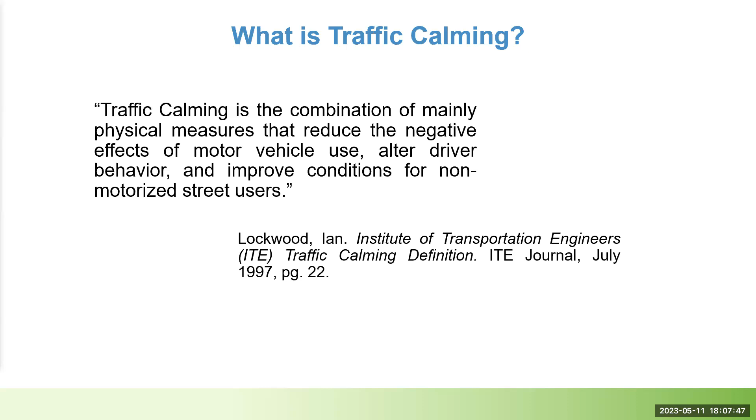There are quite a few examples of traffic calming in Ann Arbor, so we'll show some of them in later slides. But if you weren't familiar before today, the traffic calming program in Ann Arbor is designed to provide residents with a formal process for engaging with the city in a partnership to perform a technical analysis of traffic concerns on local streets and to explore potential solutions using those fundamentals of traffic calming.

Here in the city, it's a 5-step program. I'll briefly describe each step, but there's a guidebook available online that has more detail if you'd like to review anything after this meeting.

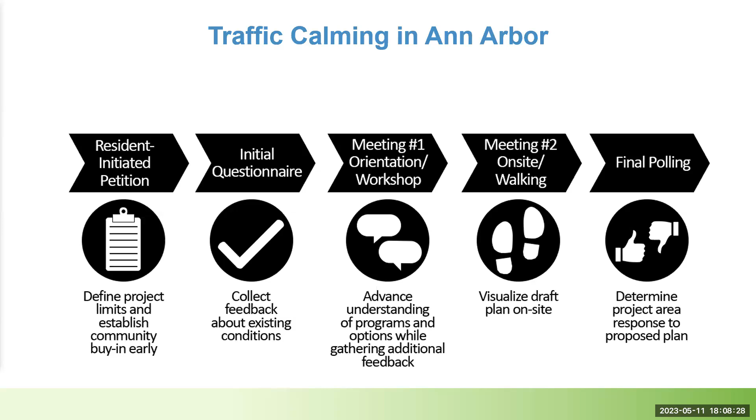Starting with step 1, the Grandview Drive project started with one of your neighbors acting as a petitioner who submitted a request to the traffic calming program for Grandview Drive between Jackson Avenue and Dexter Avenue. After defining the project area, the petitioner gathered signatures from other residents who also live in this area.

The requirement for the traffic calming program to accept the request is that at least 50% of the defined project area must support the project, and then a preliminary technical study must result in at least 10 points. The Grandview Drive project area managed to collect signatures from 100% of the addresses, and the preliminary study resulted in 11 points. There is a breakdown of those points available on the project website, but that slide is just to show you that we were able to move on to step 2.

So at step 2, Wade Trim sent out mailers with an initial questionnaire to all of the project area residents, just to gather feedback on specific concerns you may have had or may have, and what experiences you may have previously had with traffic calming. The requirement to continue on to step 3 is that at least 50% of those who participate in the questionnaire must support the project moving forward.

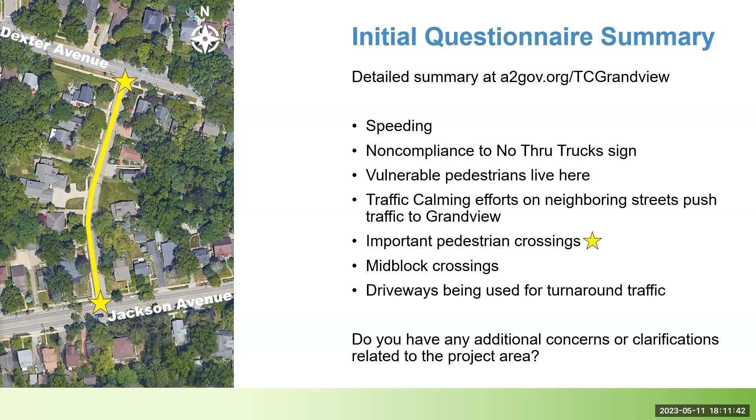Okay, step 3 is where we are today, where most of the focus for the rest of the meeting will be. Before we present the starter idea, we'll just go through an overview of the device toolbox that's described in the program's guidebook.

Before I do that, I will launch another poll that's just asking how familiar you might be with the guidebook. The question reads: have you reviewed the traffic calming guidebook, specifically the device toolbox found on pages 9 through 12?

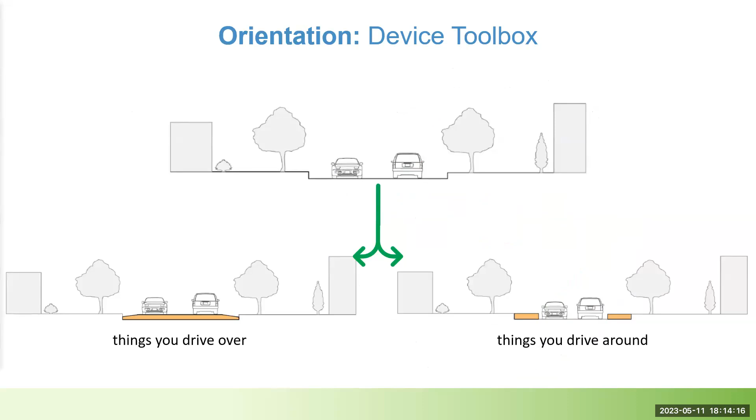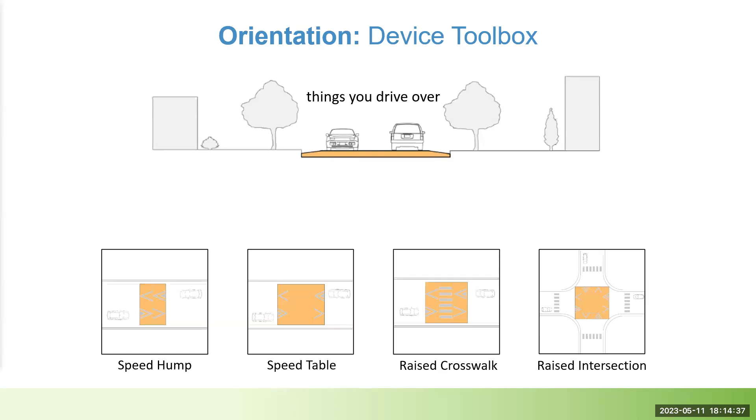On pages 9 through 12 of the traffic calming guidebook, devices are grouped into things you drive over and things you drive around. The things you drive over are devices that slow traffic by creating discomfort if traveled over at a speed exceeding 25 miles an hour. The device toolbox presents four devices in this category: speed humps, speed tables, raised crosswalks, and raised intersections.

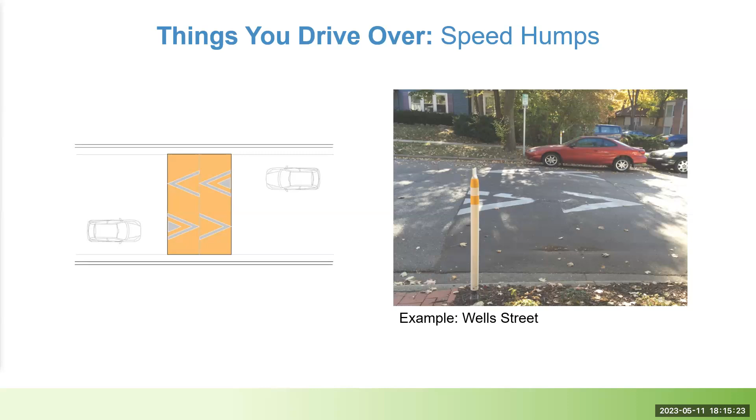Speed humps. A typical speed hump diagram is shown on the left, and an example from Wells Street is shown on the right. Speed humps are typically 12 feet long, 3 inches high, have a parabolic shape, and extend the full width of the street except for the gutter. Studies have found benefits of speed hump treatments may include speed reductions, traffic volume reductions, and crash reductions. Other notes: the height is designed for ease of bike usage and bike safety, and if previously permitted, vehicles can park on speed humps, and trash cans can also be placed on them if necessary.

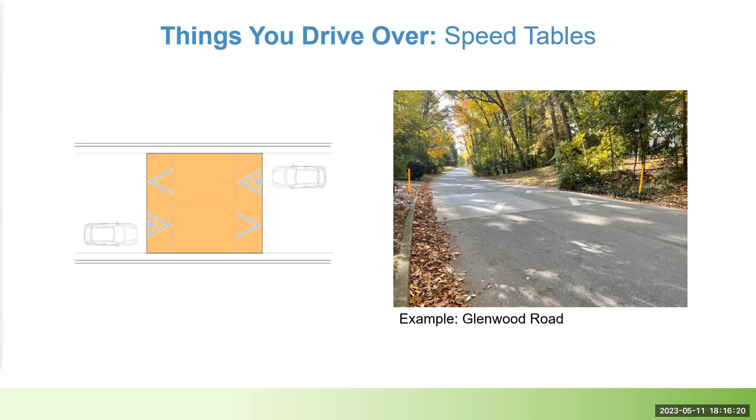This is a speed table, with a fully constructed example on Glenwood Road near Washtenaw. Speed tables are raised devices that extend the full width of the street except for the gutter. They're typically 22 feet long with tapered edges, a flat 10-foot center platform, and 3 inches high. Studies have found benefits may include traffic volume reductions and crash reductions as well. Other notes: speed reduction is less than the speed hump, the platform width can be customized, the height is designed for ease of bike usage and safety, and if previously permitted, vehicles can park on speed tables and trash cans can be placed on them if necessary.

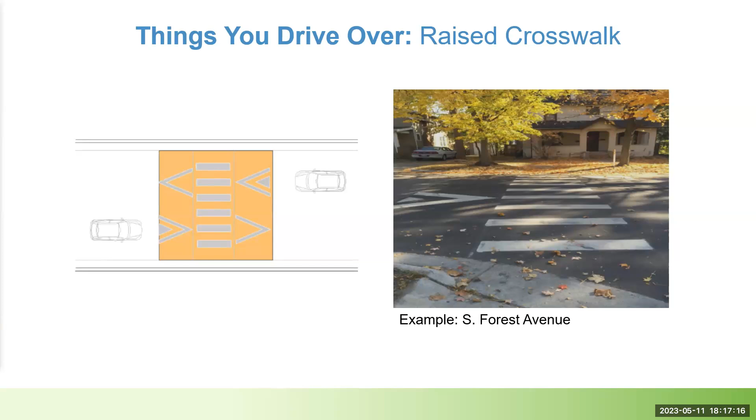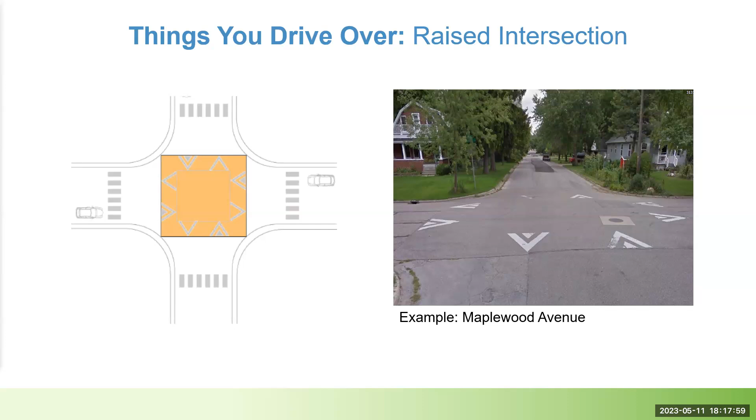If there are any questions about the devices you drive over, please raise your hand or use the Q&A function. It looks like we have one here.

Not a lot of speeding issues over 25, as it's such a short street. I think the no parking near the entry of the street is the bigger issue, as well as parking of special vehicles near intersections.

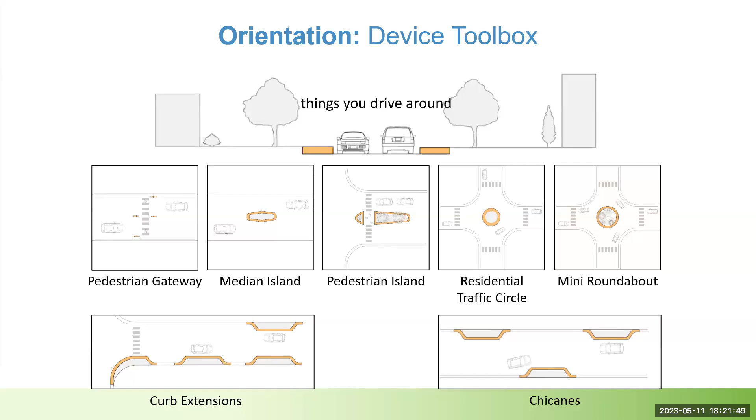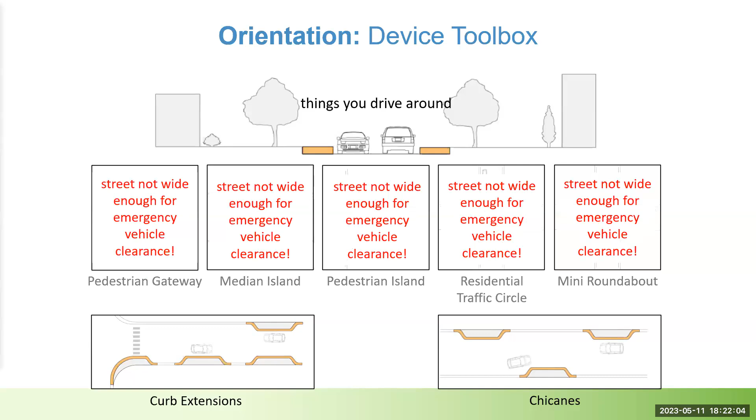The next few slides will describe each of these devices except for those marked in red. These devices have been omitted from this project due to the street width requirements set by the fire department and conflict with existing traffic controls.

So the first one we have here is curb extensions, which can be used in several designs: curb bump outs, mid-block bump outs, and chokers. Shown on the right is a bump out at Granger Avenue and White Street. Curb extensions act as an extension of the curb line to physically and visually tighten the corridor by narrowing street width. Two parallel curb bump outs can be used to create a single lane width passageway or choke point.

Alternating curb bump outs can be used to create the chicane effect. Curb extensions may require drainage considerations, may require the loss of on-street parking, may cause debris to collect around the device, and must maintain 20 feet for emergency response vehicles. Two-lane chokers may result in a speed reduction and have been shown to produce a minor reduction in traffic volumes.

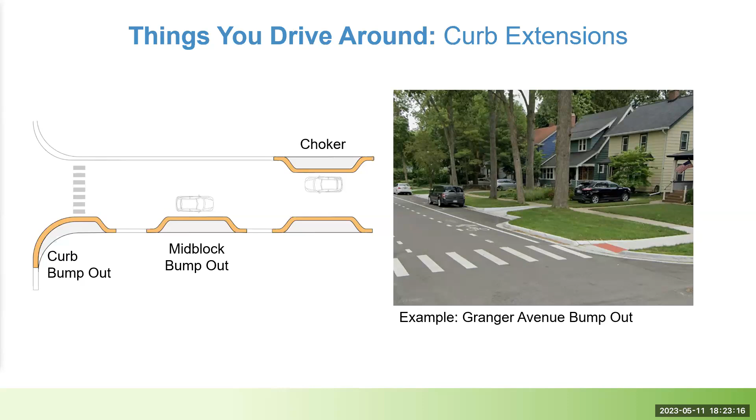The next slide is for chicanes. This slide shows an example of alternating curb bump outs that create a chicane effect. Like other curb extensions, chicanes may require drainage considerations, may require loss of on-street parking, may cause debris to collect around the device, and must maintain 20 feet for emergency response vehicles.

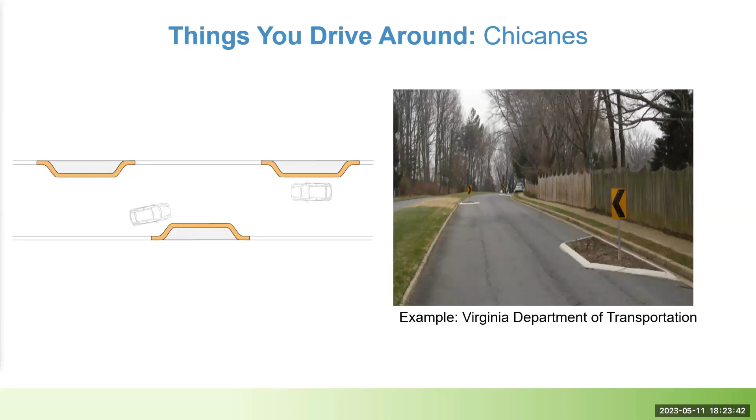And then other devices include neighborhood gateway treatments. These are a physical landmark that indicates a change from a higher speed arterial road to a lower speed residential or commercial district. Neighborhood gateway treatments can increase awareness for residential speeds and may require additional right-of-way. In addition, neighborhood or adjacent property owners would bear landscaping, installation, and maintenance costs.

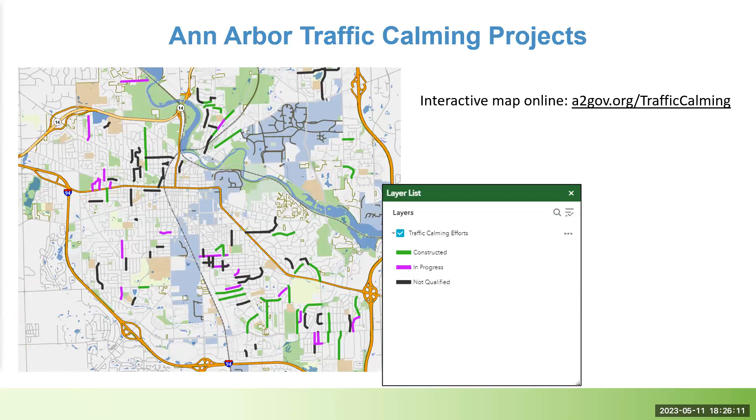Next we'll present our starter idea, which is just a draft plan we've created based on data collection, engineering judgment, the preliminary traffic study, and feedback from the initial questionnaire. There will be an opportunity to answer questions on each of the devices and discuss any changes you'd like to see to the plan. Keep in mind this project is limited to the devices Lori just reviewed. Even though more are available in the guidebook, because of constraints with this street, some would not work.

I'll pause here and let you take a look for a moment before I move forward, because the next slide is zooming in on that first device.

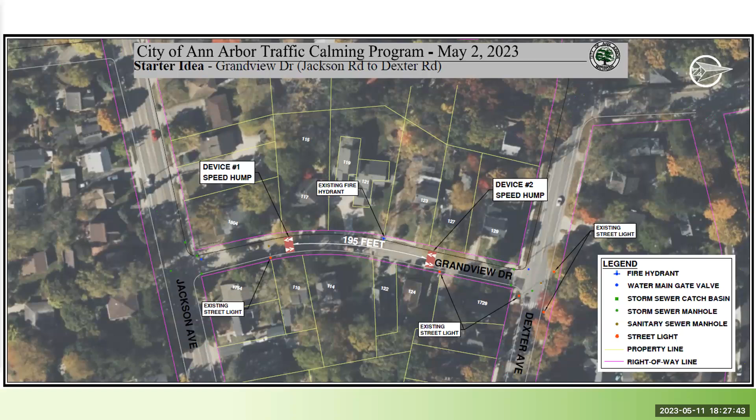So these two slides are going to be pretty similar, but device number 1 is a speed hump near 110 and 117 Grandview Drive. Speed humps are most effective when used in a series, spaced so there's not too much room for vehicles to speed up between each one, but also not so close that vehicles end up going under the speed limit and have the rest of the block to pick up speed again before the end. So 200 feet is roughly the minimum distance we want between these raised devices.

There's only about 500 feet of street on Grandview Drive, so we've just chosen a pair of speed humps as our starter idea to see what kind of feedback or thoughts come up from that.

Just as a reminder, speed humps can result in speed reduction, traffic volume reduction, and crash reduction. Just things to keep in mind: if on-street parking is legal and permitted, it's still permissible with speed humps. They are designed to be safe for both vehicles and bicyclists to travel over.

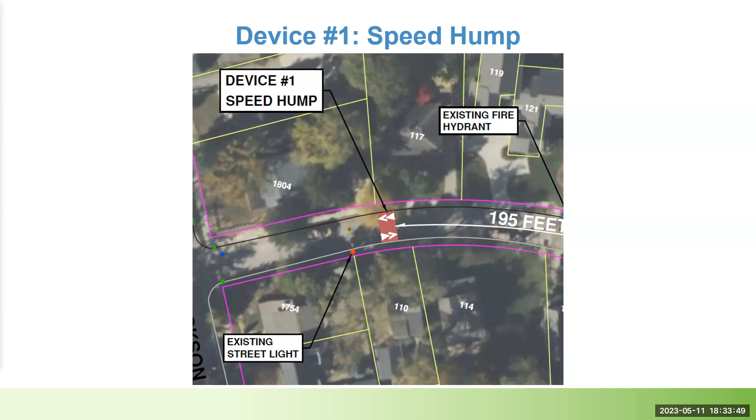Okay, and then device 2 is another speed hump. It's just under 200 feet away from the other one. This one's near 124 and 127 Grandview Drive, so just on the other side of the block towards Dexter.

I will say that there was a bit of a challenge with the number of driveways that are staggered along Grandview, so we did have to find locations to make sure that the speed humps weren't in front of or encroaching on anyone's driveway. I can't recall if there was a lot of wiggle room with these locations.

But again, speed humps can result in speed reduction, traffic volume reduction, so it would slow trucks down and maybe in the future deter them. But also, as Lori mentioned, because there is a no truck sign at the ends of the street, the Ann Arbor Police Department could be brought into the conversation to help with enforcement on that.

And then community standards would be the contact to reach out to about removing some of that on-street parking so close to the intersection.

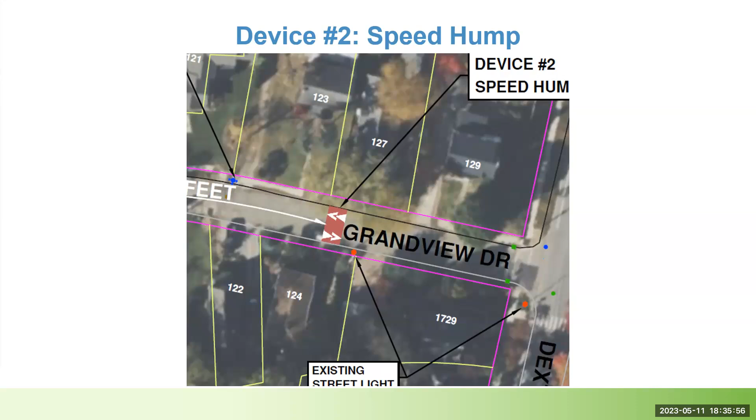Were there any other questions or feedback on these devices or just on the approach? I'm going to move on to polling, but if there are any questions, please raise your hand or use the Q&A function.

So the next two slides are just poll questions for those two devices we just discussed. Poll question is, do you support device number 1, the speed hump that's near 110 and 117 Grandview over towards Jackson?

And I know not everyone was able to join when we did one of the earlier poll questions, but there are options if you happen to not live in the project area and are attending this meeting. But I do think that everyone here is a resident of Grandview.

I will share the results. It looks like we all have support for this, which is great. I love to see it. If there's any context or any hesitation, just use the Q&A, you can do it anonymously, you can raise your hand. I want to make sure that we get as much feedback as possible from everyone.

But then the next one is just the same kind of question. Do you support device number 2? This one is the speed hump that's towards Dexter at 124 and 127 Grandview. And it looks like everyone's supportive of this.

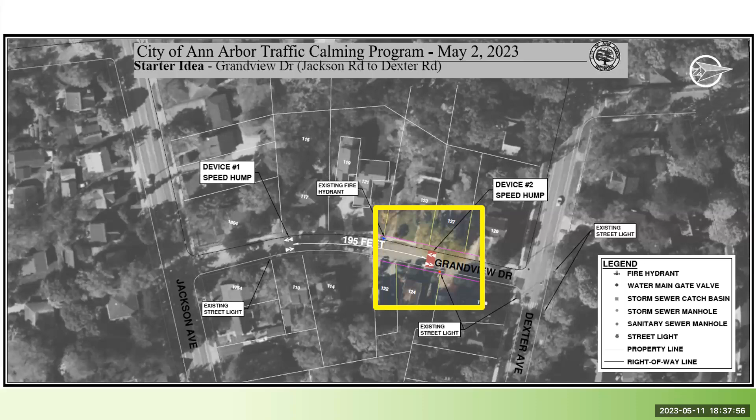So perfect, that was the end of the feedback. The next few slides are just to discuss how the rest of the traffic calming program will go.

So over the next week or so, we'll post today's presentation and the recording to the project website, so if anyone wants to go back to it, or if any neighbors weren't able to attend but wanted to get a summary, we're also going to post a summary of today's polling and use feedback to make sure that we've looked at everything before we come up with the preliminary plan.

That summary will also have, I'll put in writing, who we need to reach out to address those issues of the intersection parking and truck violations. So that'll be in the summary.

The next step will be meeting number 2. Meeting number 2 will consist of 2 parts, which are a self-guided tour and another Zoom meeting. The Zoom meeting is scheduled for July 13th.

For the self-guided tour, you will receive a mailing packet at least 2 weeks ahead of the Zoom meeting. The packet will contain device images and descriptions, which can be utilized to complete a self-guided tour prior to the meeting. Approximate device locations are going to be marked in spray paint on the pavement.